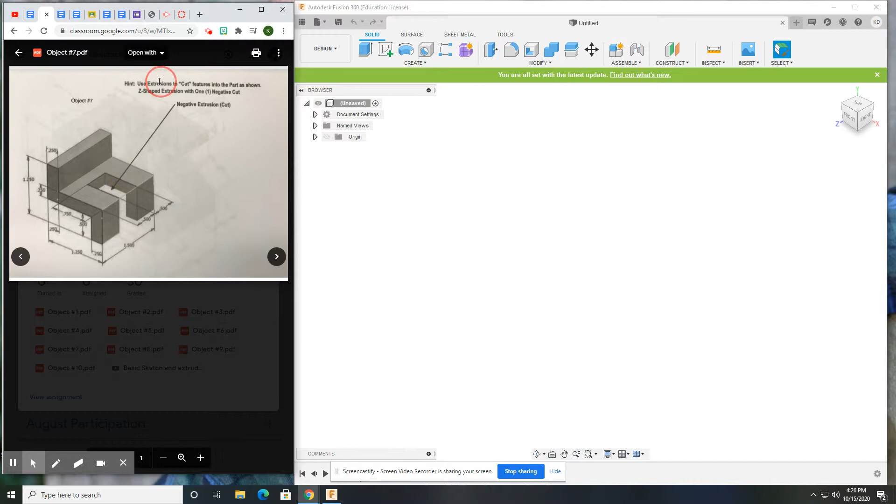So let's go ahead and sketch this. I'm going to put the origin at one of my corners here, and go ahead and sketch the Z shape, or whatever you want to call it.

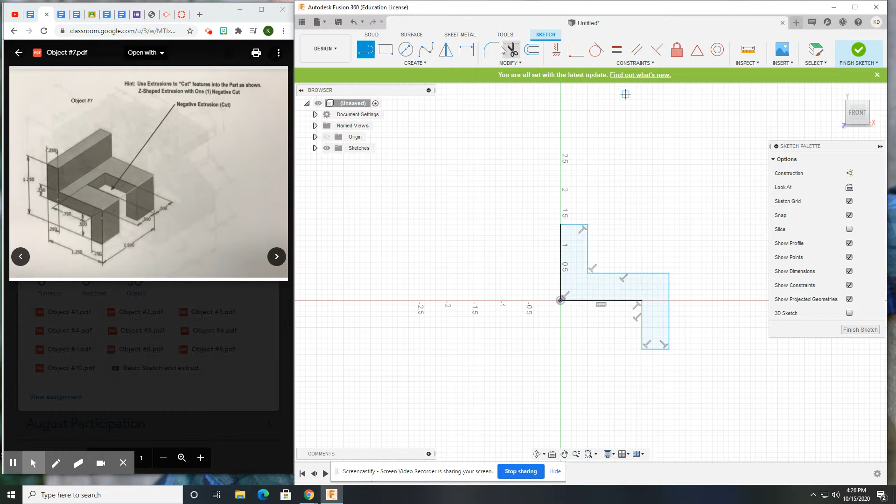Now let's start putting in our information. Usually I like to start with my larger dimensions first. Bring that back in. I have overall dimensions top to bottom, left to right, so I'm going to put those in, and then I can get all the smaller dimensions in.

0.25 is referring to the thickness of the object. Cut another one here. And what else do we have? We have a 0.5 from here to here.

If I take a look at my sketch icon here, I can see by that red padlock that it is fully constrained. So I'm ready to make it solid by extruding it.

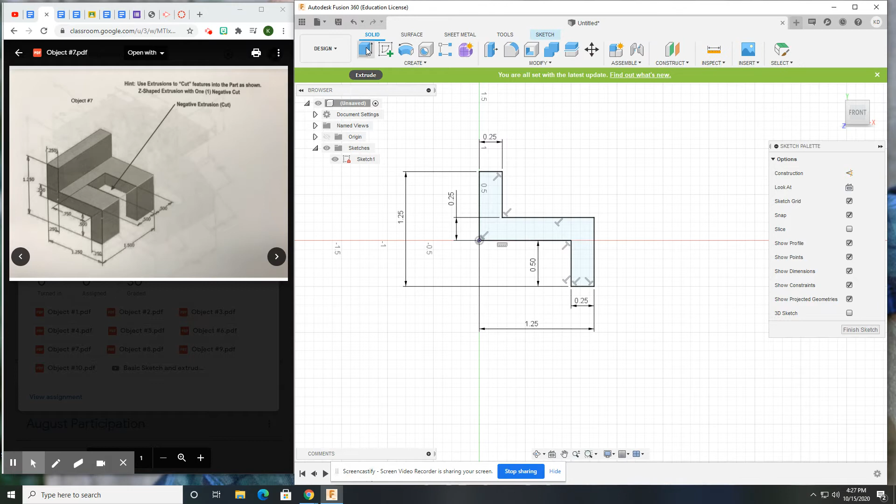Now it seems to extrude towards the back, so that's going to be minus 1.5 inches over here. Minus 1.5. Let's look at that from the isometric view. Yeah, that looks pretty good.

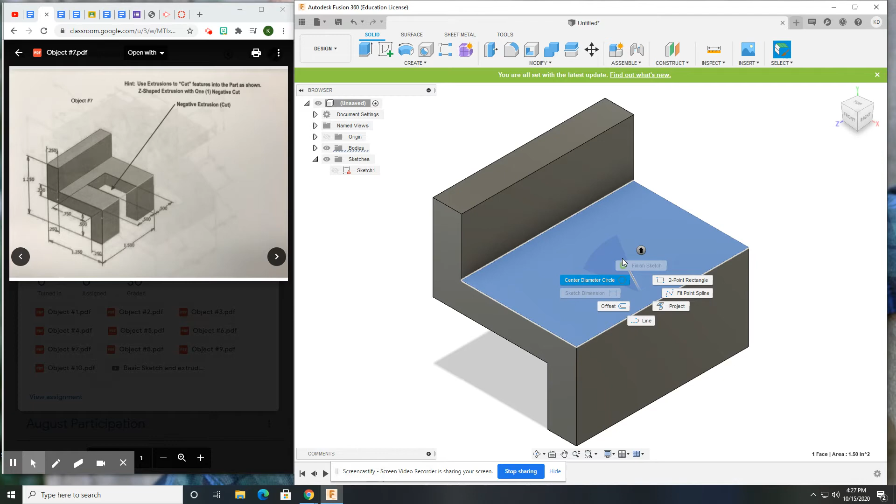Now I just need to draw my sketch in here. I usually do my sketches this way, even though there's more than one way to do it. This is a rectangle, so I'm just going to put it somewhere around here.

Put in my dimensions. Now if I look, there's a dimension from this front edge to this edge of the rectangle, there's a height to the rectangle, and there's a width. So let's put in what we're given, nothing more, nothing less.

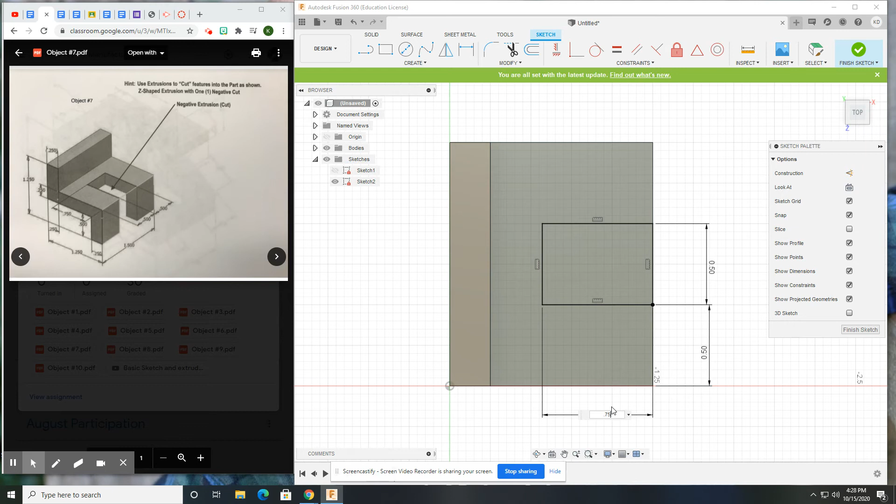That's a 0.5, from here to here is a 0.5. There's the width at 0.75. Now, if I look at the sketch icon here, it tells me that this is fully constrained.

So let's go ahead and cut it. Select my profile, we're going to do a cut. And how far down is the question?

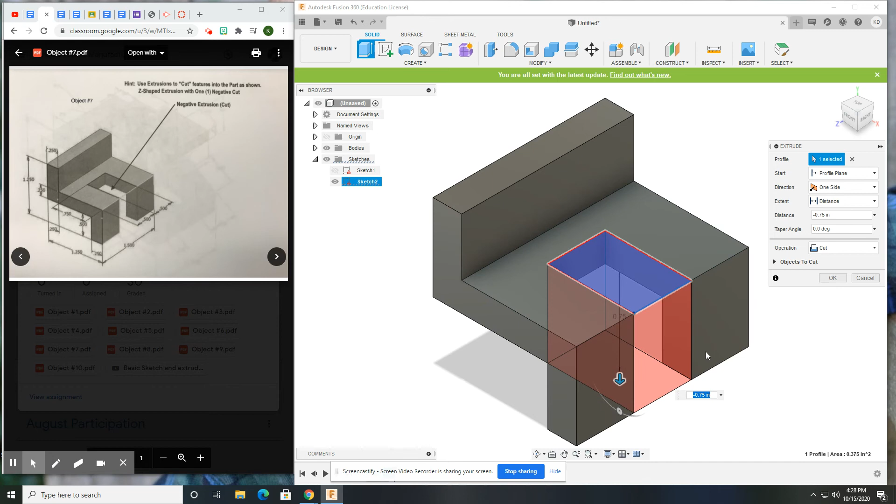So I clearly need to go to at least this point. If I don't know the distance, which isn't given to me anywhere here, then really the best choice is to do a 'to object' cut.

Now I can come down and select this face and it'll cut all the way through there. It's probably the best way to do it, especially in instances like this where you don't have that dimension.

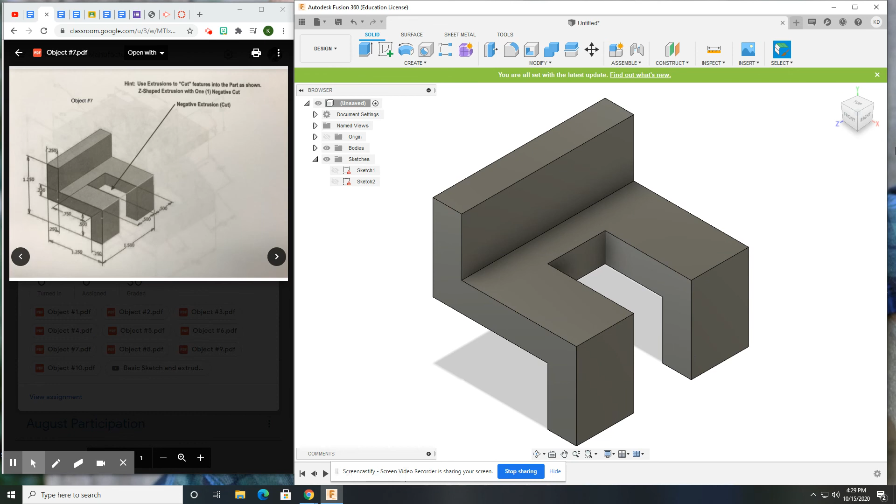Go to my isometric view, collapse my sketches, name it properly per the naming convention that's given to you. Make sure you locate this in the right folder, and everything looks perfect from here.